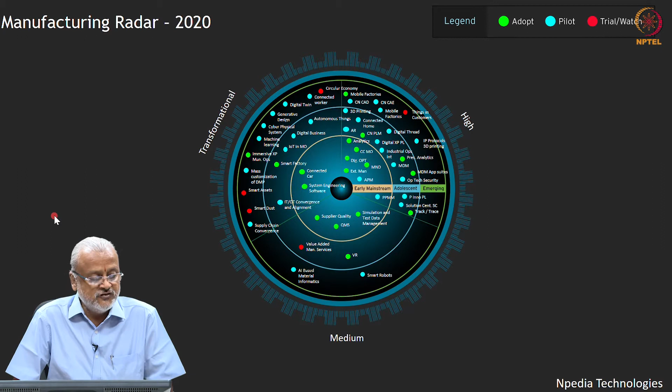Welcome back, guys. We are in the second session of the technology radar for manufacturing. Just to recap from the last session, we briefly looked at the definition of technology radar and its components, the emerging technology radar, and the manufacturing radar. In the current session, we are going to go deeper into each technology and understand what the journey map is going to be.

So the first one I want to look at is wait and watch. These are new technologies that are emerging and have the potential to dramatically change or impact the industry. There are certain early adopters of this technology, and people, process, and standards need to evolve. So where does it stand is what we are going to be looking at.

Let us go into the radar companion and see what it says. Circular economy is a term describing the economic model that separates the ability to achieve economic growth from consumption of virgin natural resources. This is based on a closed loop system, and the idea is to reduce pollution, encouraging the returning, recycling, remanufacturing and reuse of products and materials. It becomes very important in the manufacturing aspect of it.

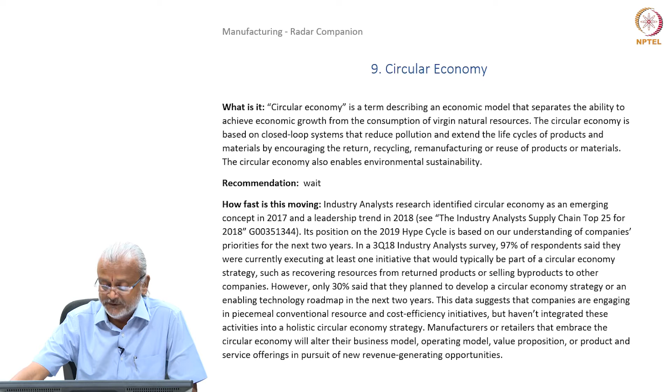Let us look at some of the trends we see in the market. It is based on the closed loop system that reduces pollution and extends the life cycle of products and materials by encouraging return, recycling, remanufacturing and reuse of products.

In terms of the model that people are adapting, you can see the flow chart here. Normally the raw material comes in and the design is what consumes the raw material and gets used in the manufacturing consumption. During the consumption life cycle there is some maintenance you may be doing, and then when it comes to reuse and refurbish, that's another cycle.

Before you discard, what we are trying to do is figure out from the product which parts could be potentially reused. Then the recycled components feed into the raw material part, completing the cycle, and the residual waste is what remains.

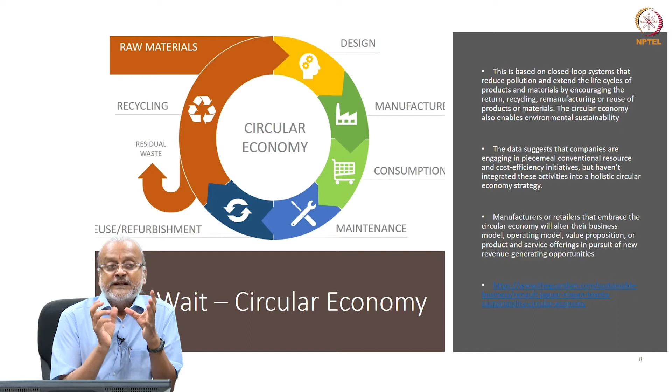If you look at the overall picture, the data suggests that companies are engaging in a piecemeal conventional resource and cost efficiency initiatives, and they have not completely integrated all the activities together. That is the indication that we have to wait and watch in terms of standardizing so everybody can adopt it.

Whereas if you look at the manufacturer or retailer, they have embraced the circular economy and they will alter their business model, operating model, value proposition, and product and service offering, coming into a new model.

There is a link that I have given here that you will be able to check out later on, talking about how Renault has completely achieved the circular economy in a much more effective fashion. Okay, so much for the circular economy.

It should have given you an indication of the nature of wait and watch technology. It still gives you transformational benefit. How do we evaluate it and build our journey map around that? Let's look at the next technology.

We call it smart assets. You are probably familiar with that. Smart assets are records of assets stored in a blockchain and a distributed ledger, where the ownership and transfer can be managed through smart contracts, and smart contracts are improving.

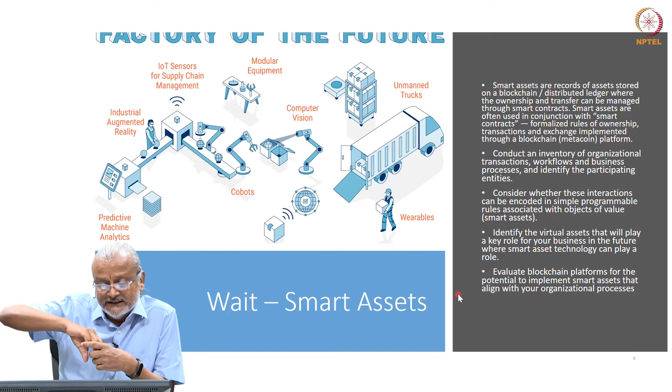So the flow that we have and the operations and quality control that we need to do, everything becomes different. So in order to manage that effectively, the smart contract will have to be configured differently. That's why that variation will happen between industries. So what are the different components that are affecting the smart contract? That's given in the picture on the left hand side here.

What you have is predictive machine analytics managing the overall productivity of the machines. It will be able to tell you about failures before they happen, so that your overall workflow is effectively managed. And industrial augmented reality will help you figure out defects in a much more effective fashion.

And IoT and supply chain management will help you improve the flow of your manufacturing. And there is this technology called cobots - they are bots, but they will be able to work with human beings, enabling variations or customization if you need. So they are looking at augmenting human beings' efficiencies and productivity, and they work in synchronization.

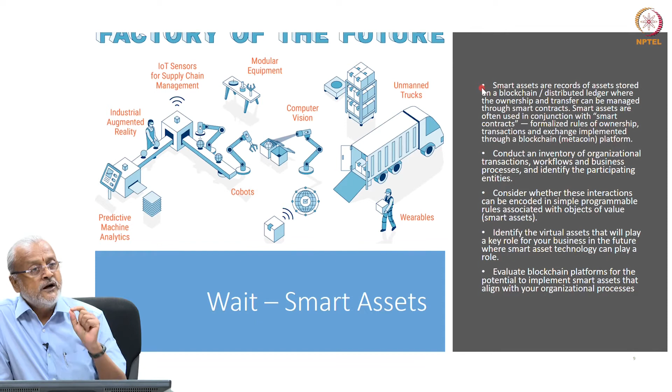That is what is given on the right hand side. We need to conduct an inventory of organizational transactions, workflow, business process, and figure out what are the participating entities in that. And then we need to consider the interaction that can be encoded in simple programming rules.

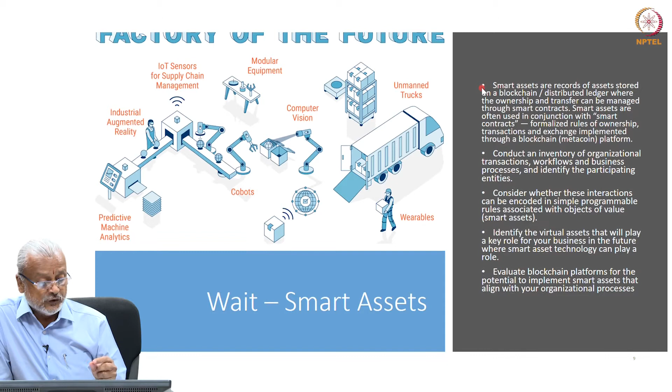It could be that your assets' delivery needs to happen within a specific time, maybe within some specific temperature. If you look at pharma, the output has to be maintained at a specific temperature even while getting shipped by air. So all of that needs to be captured within the smart contract programming. And then we have to identify the virtual assets that will play a key role for our business in the future, where smart asset technology can play a role. That becomes an important aspect as well.

And then if you look at blockchain, there are many platforms available in the market. Figure out which blockchain will be more suitable for you to implement. Most of the blockchain is open source - you will be able to use any of them. So this is what is involved, and it is a very impactful technology that you will be able to use for your productivity and efficiency, but you need to develop skills around that to make it happen.

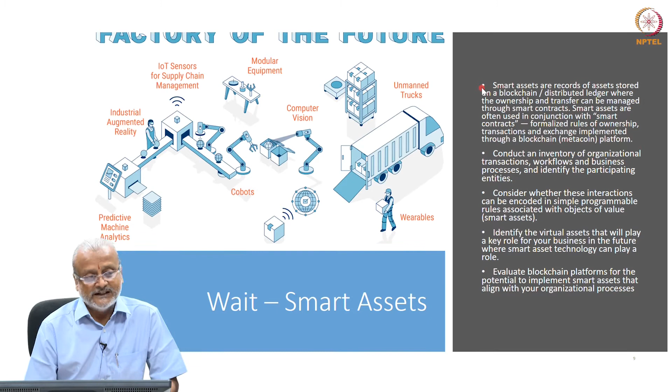So now let's look at some of the other ones. This one is a very thought-provocative, imaginative, creative aspect of it. Generative design - the word itself is very provocative. The design needs to be automatically generated. Can it be done? 5-10 years back it would have been difficult.

Today it's very easy because there is this AI-grown technology called generative adversarial network, which is called GAN. And it's able to figure out from the past designs you have, the user orientation that is out there, and the feedback from the customer - all of them put together. We had been doing this manually, and the person who is able to do this is called some kind of a guru in design. But interestingly, using AI, you will be able to do that effectively.

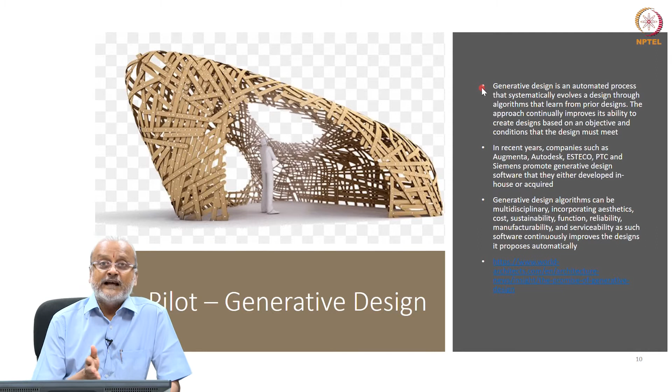That's why we are saying pilot, do a pilot on that, and it's going to have an impact on your manufacturing, and you will be able to come up with the best possible design.

Not necessarily, they used to have another technology called crowdsourcing. You look at all the global players, and then they will contribute to that. Using that, you will do the design.

Not like that. This one is more like, the intelligence is gathered and put into the artificial intelligence framework, and it will be able to come up with a recommendation, and then it can tell you about some of the trends, some of the constraints that you have. Within that, you will be able to design your solutions.

So the generative design algorithms can be multidisciplinary. That means it can have design aspect of it, strength of material aspect, environmental aspect, policy design aspect. It can be multiple things, incorporating aesthetics, cost, sustainability, function, reliability, manufacturability, serviceability, all of them can be converged, and it can really handle the complex wicked problem as well.

So I have given a link that has looked at the various technologies and architectural solutions that are out there. When you have some time, take a look at that. Let's look at the next technology here.

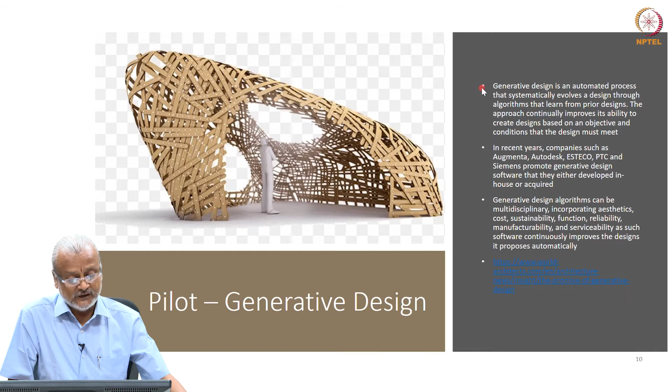If there is one technology that has been beaten to death in the last 2-3 years, it's machine learning. Machine learning is going to have impact on every other technology that you have, every other industry that you have. But let's look at some of the aspects and vectors around it.

Machine learning is a technical discipline that identifies patterns and generates predictions based on analyzing large sets of data. So there are 3 major subdisciplines that we have to be looking at: supervised learning, unsupervised learning, and reinforcement learning. So these are the components that you need to be looking at in terms of practicing it.

So you need to adapt machine learning from this aspect, that is, do you have a competitive value built around the solution that you are doing. That is very high. If you are saying that I have put machine learning to use in order to derive a particular solution or service, and that will give you a competitive edge.

And almost I would say all the vendors are looking at machine learning as an aspect. It is also based on data, audio signals, visual signals, and it's also added with the generative adversarial network. There are several components that are coming together in that.

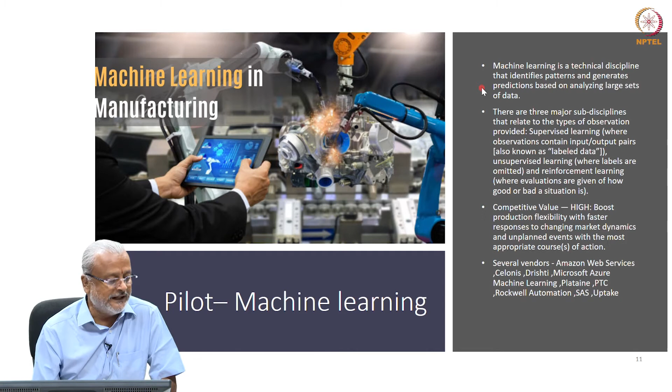So I think piloting the machine learning becomes a very important technology that you need to pilot right now. It's more like right now we got to adapt that, that kind of technology is what we are looking at.

So adopt is very interesting, right. That means that people, process, technology, standardization, everything is matured there. You just have to look at technology, adopt technology and start using it, and that's what adopt is about.

Here we looked at the immersive experience, AR, VR and MR. So there are some solutions that are there in the market that are completely fascinating.

Software went through something called DevOps, development and operations combined together, and they felt it can be done by one person or one resource. Here what is happening is sales and service, can you merge together? And the answer seems to be, yeah.

What do we need? Let's say you want to service a part. That means you need to know what are the components of the machinery. You need to know how to open it. You need to figure out which component is going where. You need to disassemble it, do some service on it, and do it. And all of them, very interestingly, can be done using AR.

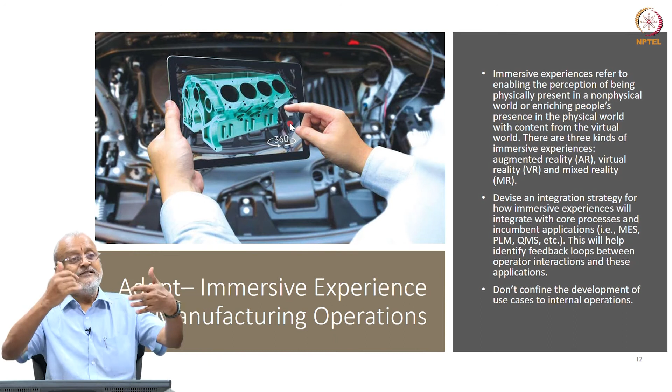You look at something like a machine part, what you see on the right hand side, and your tablet or your mobile. If you can develop an app, or there are some already existing apps, you show that in the camera, it will show the internal parts of the engine to you, and it will tell you the sequence by which you can open it up, dislodge it, and you will be able to service it and put it back.

So interestingly, how do we used to do this 5-10 years back, or even a year back, or even in some places now? You go through some reams of manuals and figure out which component is there, go through the standardized coding, you need to know the standards. A lot of paper related, reference manual related complication is all taken away, and your productivity is increased like anything in this. And this is about one aspect of the AR.

When new technology comes, there is always this digital divide that happens in terms of you need to get experience about the technology, but you need an expensive technology environment to make it available. Whereas if you have AR or VR, it will be able to give you the immersive experience, hands-on experience, and you will be able to internalize the knowledge around how to make it work for you.

Here again, the DDD - dull, dangerous and dirty jobs - are good targets for AR application. Let's say you want to train somebody for disaster recovery work in a nuclear plant, make them ready for operational sensibilities on what to do next. It is not a difficult thing anymore - it used to be complicated. So these kinds of benefits are overwhelmingly helping everybody everywhere.

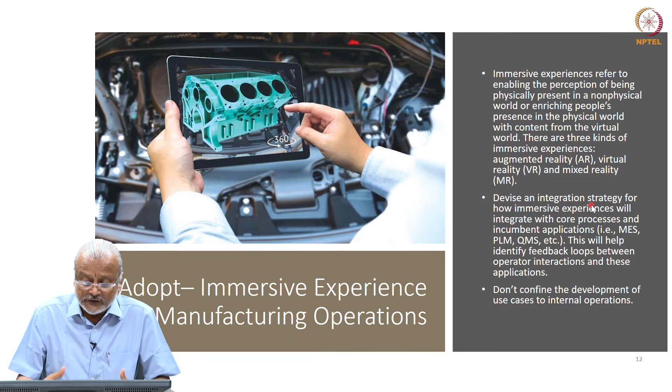So if you want to adopt this, what you need to do is devise an integration strategy for immersive experience, which will integrate the core processes with the incumbent application - it could be a PLM, QMS, MES. There are several applications that are there. It's going to help identify feedback loops between the operator and the interaction between those applications, so a lot more can be gained out of the immersive experience.

All the technology we talked about so far has transformational benefits. So immediate gratification you will have if you are able to adopt the immersive technology. That's what I would say.

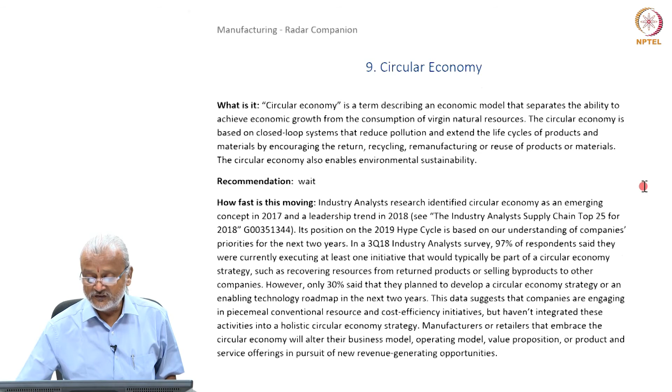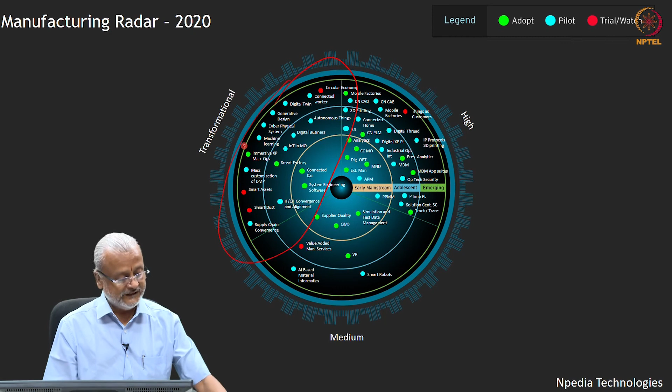What I have done is only taken 6 technologies as examples. Let's look into the manufacturing part - there are several technologies that you will see here. There are over 68 technologies that are there. Even if you go back to indication of how many technologies are in the transformational realm, there are over 15 to 16 technologies. At minimum, I would say you need to be evaluating this. So that could be a good journey map you could be having.

Let's look at the last part, which is the smart factory. We looked at smart assets, now we are looking at smart factory. What is the difference between them? We already know that smart asset is very close to distributed ledger or blockchain technology, tightly integrated with the business flow. Now if you look at smart factory, it's more like a concept used to describe application of different combinations of modern technology to create hyper-flexible, self-adapting manufacturing capability.

Sometimes you could call it Industry 4.0, but it is becoming more than that. There is another lecture I'm going to give on agile manufacturing, which leans on the smart factory, because sometimes your production could be disrupted. Your production capacity will have to be reconfigured and remodified for a new set of products. Modular design may be needed - those are some of the requirements around smart factory establishment.

So in order to make it happen, we have to roll out a smart factory concept as part of an agile supply system, integrated with connected customer demand, because when customer demand varies, your production will have to change as well. We'll see more in the agile manufacturing session shortly. Then we have to differentiate between brownfield and new greenfield capabilities, and look at innovation as a way to make the smart factory happen, identifying the ideal technology combination that aligns with smart factory for specific segments and its supports.